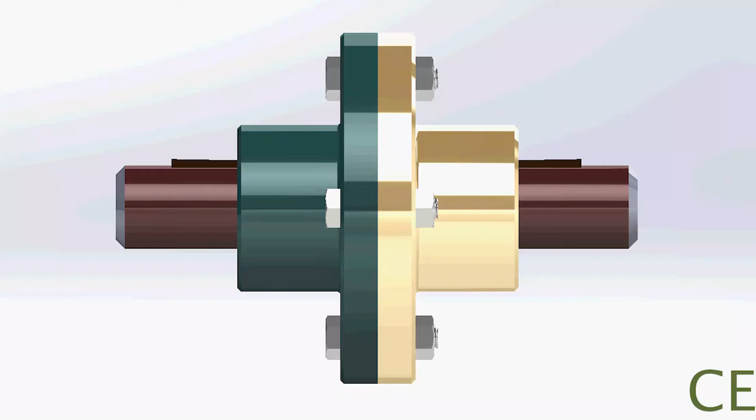Flange couplings are a type of rigid coupling used to connect two shafts which are perfectly aligned. They have a simple arrangement, and importantly, these couplings are inexpensive as well. A flange coupling consists of two flanges keyed to the shafts.

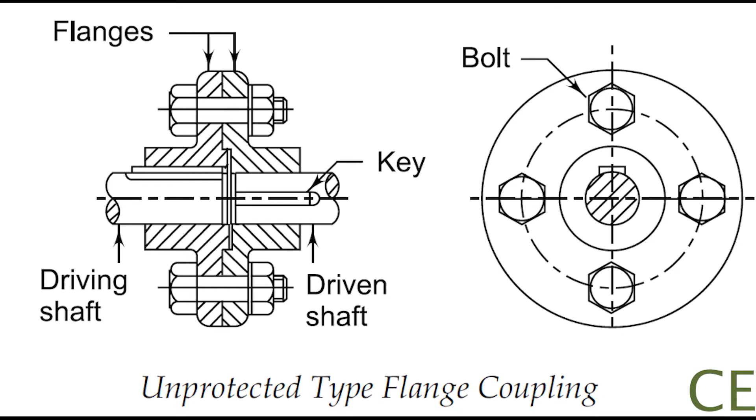The two flanges are connected together by means of 4 or 6 bolts arranged on a circle concentric with the axis of the shafts. Power is transmitted from the driving shaft to the left side flange through the key. It is then transmitted from the left side flange to the right side flange through the bolts. Finally, power is transmitted from the right side flange to the driven shaft through the key.

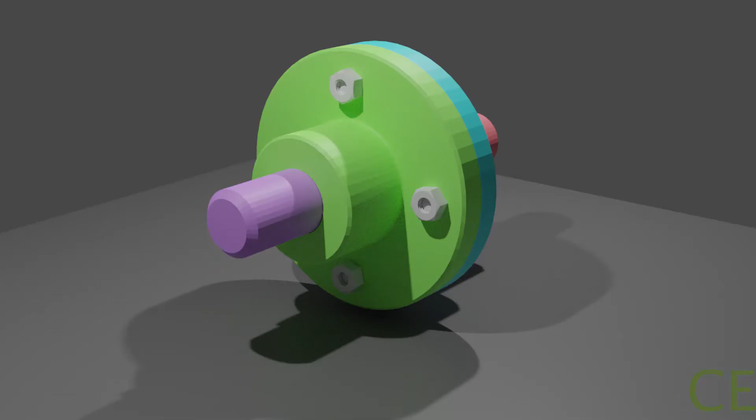Since flange coupling is a rigid type of coupling, provisions should be made for precise location of the axis of the two shafts, which, as I have already mentioned, must be aligned perfectly. A projection is provided on one of the flanges and a corresponding recess is provided in the other for proper alignment. Basically, flange couplings are of two types, protected and unprotected.

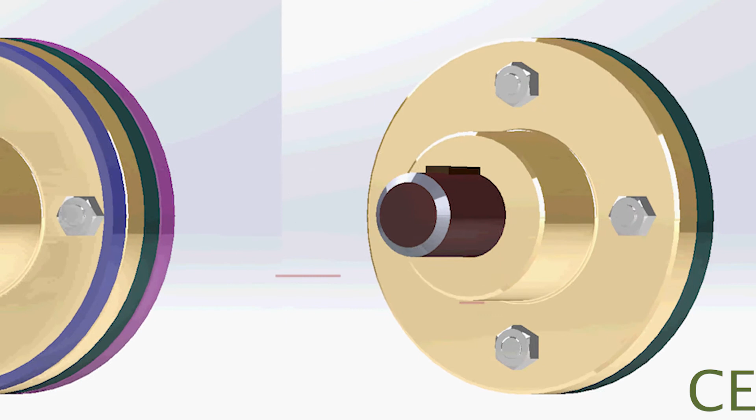In the case of unprotected flange coupling, the revolving bolt heads and nuts are dangerous to the operator and may lead to an accident if there is failure of bolts during operation. The bolts may hit the operator, as we can see from the arrangement of the unprotected coupling. Thus, to avoid this, protective circumferential flanges are provided in the protected type flange coupling.

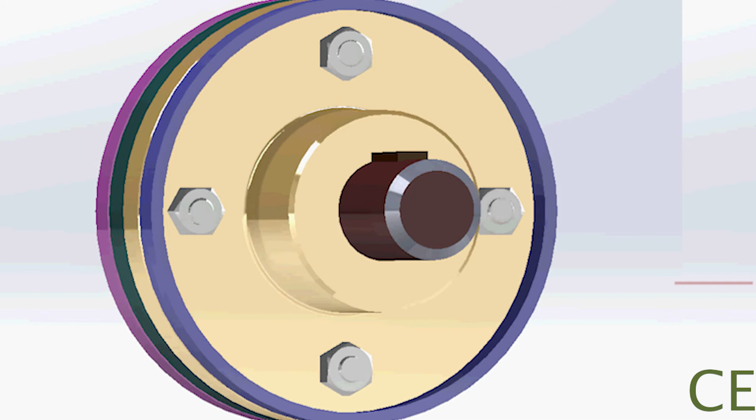In case of failure of bolts while the machine is running, the broken pieces will dash against the rim and eventually fall down. This protects the operator against injuries. Now, the flange of the protected type flange coupling has three parts, namely the inner hub, flanges and protective circumferential flanges. So this is all about rigid flange coupling.

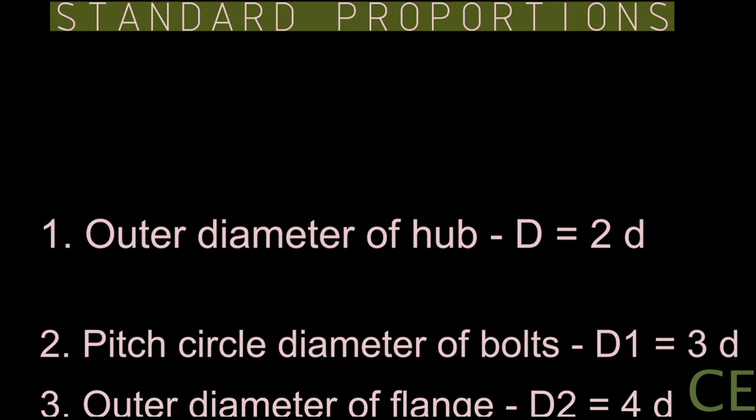Now we will see the standard proportions used in designing flange couplings and also how to decide the number of bolts. First of all, the standard proportions used in design of flange coupling: outer diameter of hub, D, equals 2d, where small d is the shaft diameter. Pitch circle diameter of bolts, D1, equals 3 times the shaft diameter. Outer diameter of flange, D2, equals 4 times the shaft diameter.

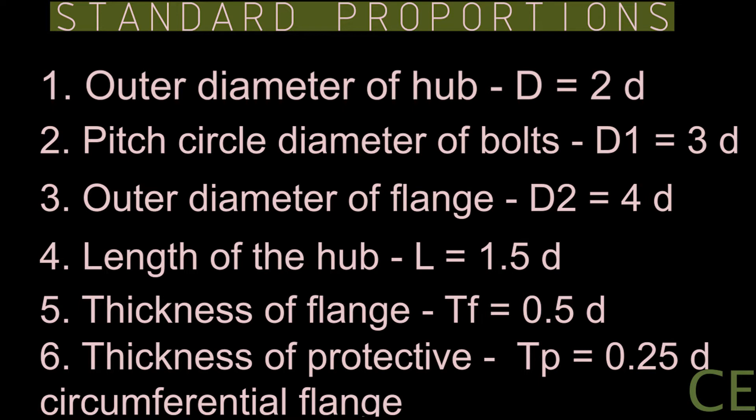Length of hub, L, equals 1.5 times the shaft diameter d. Thickness of flange, tf, equals 0.5 times the shaft diameter. Thickness of protective circumferential flange, tp, equals 0.25 times the shaft diameter, where d is the diameter of the shafts. Now let us see how to decide the number of bolts. The number of bolts is decided as per the shaft diameter.

If the diameter of the shaft is up to 40 mm, then we take the number of bolts equal to 3. If the shaft diameter is between 40 mm and 100 mm, then n equals 4, so the number of bolts will be 4. If the shaft diameter is between 100 and 180 mm, then we take the number of bolts n equal to 6. Now there are some advantages and disadvantages.

Advantages of rigid flange coupling: first, rigid flange coupling has high torque transmitting capacity. Second, rigid flange coupling is easy to assemble and dismantle. As we can see, the arrangement of rigid flange coupling is very simple, so it is easy to assemble and dismantle.

Third, rigid flange coupling has simple construction, so it is easy to design, and if anything is easy to design, it will be easier to manufacture as well. Now let us see some disadvantages. Being rigid, it cannot tolerate any misalignment between the axes of the two shafts. It can be used only where the motion is free from shock and vibration. And third, it requires more radial space.